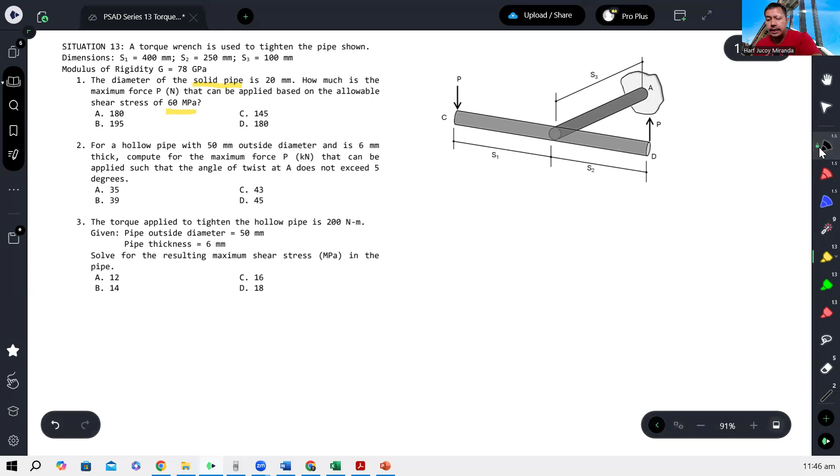First, let's assign dimensions. This is S1, 400. This one is 250. And the length of the pipe is 100. All units are in millimeters.

These two forces given have the same value, so they will be considered as a couple. A couple is composed of parallel forces equal in magnitude but opposite in direction. Definitely they will produce a moment, and that moment will give a torsional effect to this pipe.

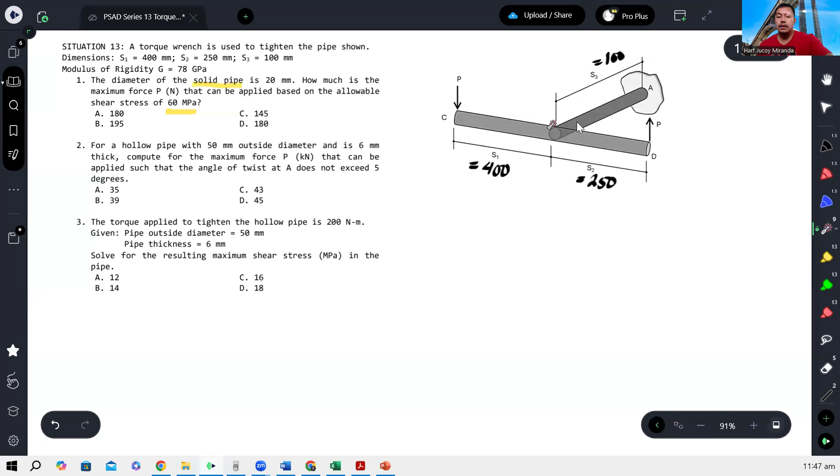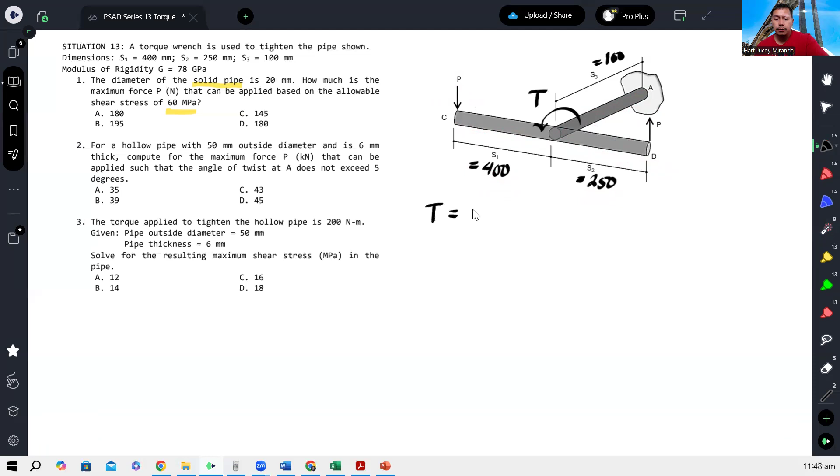To calculate the moment of a couple, multiply the magnitude of the couple by the distance between them. Here, the distance will be 400 plus 250. So the torsion applied, which we'll call T, will be equal to P times 400 plus 250, or P times 650. Assume this is in Newtons, so the units will be Newton-millimeter.

For number 1, assume the shaft is solid, with a diameter of 20 millimeters. We apply torsion, and we need to recall the shearing stress due to torsion.

That is equal to, for solid or any pipe, T rho over J, where rho, if you want the maximum, must also be maximum. So the maximum shear is found at the farthest distance from the center. Rho is the radial distance from the center, so it's at the surface.

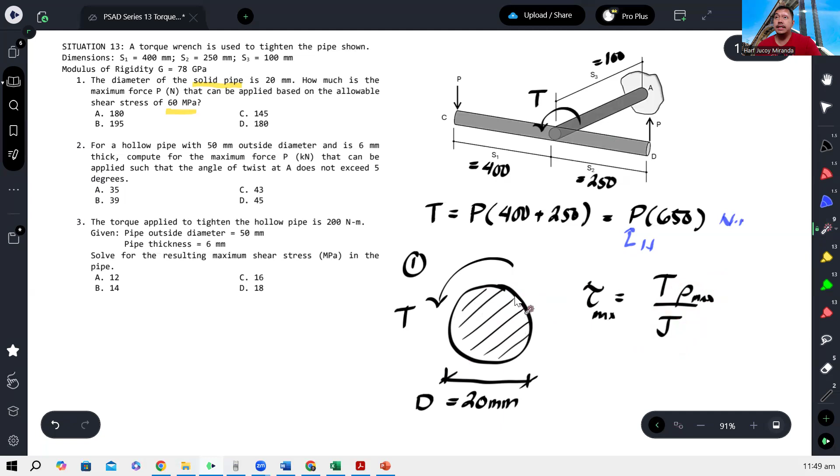And J is the polar moment of inertia. For a circle, that is pi over 32 times diameter to the fourth. And this is our torsion. I want to show that when the shaft is solid...

I don't have this memorized, but maybe you do this: the maximum shear stress equals torque times the distance, which is the radius, half of the diameter, divided by pi over 32 times diameter to the fourth. As you can see, the diameter cancels, becoming a cube. Then, simplifying, 32 divided by 2 gives 16.

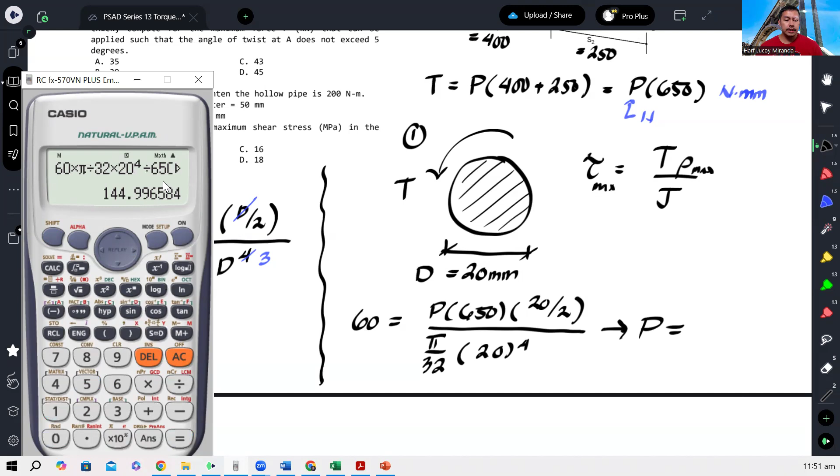From here, you can easily solve for P. So you have 60 times pi over 32, times 20 to the fourth, divided by 650, divided by 20 over 2 or 10. That gives us 144.99, or approximately 145. Take note, I assumed it's in Newtons, so this is in Newtons.

Also, this is in megapascals, this is in Newtons, this is in millimeters. So when everything is in millimeters and Newtons, the resulting stress units become megapascal. So that's for number 1, which is 145.

Number 2: for a hollow pipe with 50 millimeter outside diameter and 6 millimeters thick, calculate the maximum force that can be applied such that the angle of twist at A does not exceed 5 degrees. So now we're dealing with angle of twist, and our section is hollow.

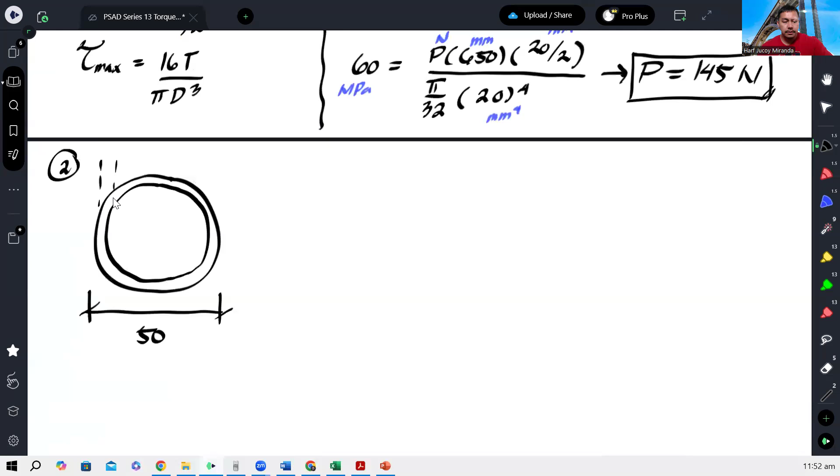So the outside diameter is 50. Tama ba? 50. Tapos yung thickness niya ay 6, 6. So ibig sabihin, yung inside diameter niya would be 50 minus 6 minus 6, so 38.

So yung outside diameter natin ay 50, yung inside diameter natin ay 38. Dahil angle of twist yung given, kailangan daw hindi mag-exceed ng 5 degrees, yung angle of twist. So ang formula naman dito is TL over JG.

Kaya lang dapat yung theta dito is naka-radians. I-convert natin yan sa radians. Tapos yung L na to is yung length ng pipe. So yung length natin, kung titignan nyo, is ito, which is yung 100. So yun yung magiging length natin.

Okay, so substitute lang natin lahat. So 5, gawin nating radians. Kaya mag-multiply ng pi over 180 as a conversion equals P. Ipapasok ko ulit dito yung P times 650 na naka-Newton millimeter na. Tapos yung L ay 100 over J.

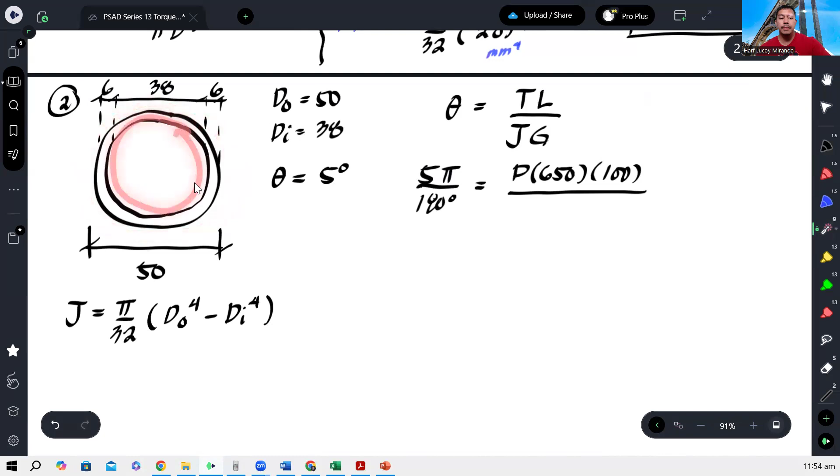So ano yung J? Dito ang pinagkaiba is dahil ito ay hollow section, ang J naman ng hollow section ay pi over 32 times outer diameter to the fourth minus inner diameter to the fourth. Kumbaga, parang minus lang natin yung dalawang solid section na buo at saka yung hollow. Minus lang natin to. Kasi di ba ang original na formula niyan is ito kapag solid. Kaya yun yung magandang isipin para lang hindi puro kabisote, puro kabisado.

Anyway, this is pi over 32 times outer diameter is 50 to the fourth minus inner diameter is 38 to the fourth. And then our G is our shear modulus or modulus of rigidity, given yun, 78 gigapascal. Gawin lang natin itong megapascal, kaya mag-multiply tayo ng 1,000.

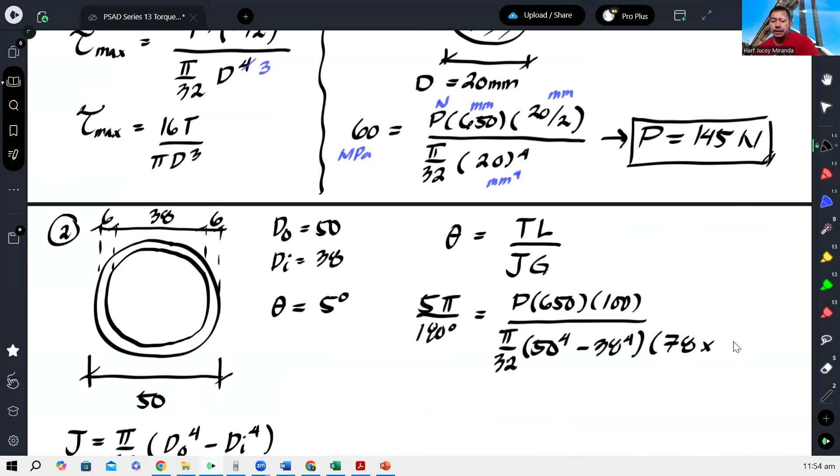Okay, and from here, we should be able to calculate for our P. We have 5 pi over 180 times pi over 32 times 50 to the fourth minus 38 to the fourth, and then cross-multiply din yung 78,000, tapos divide yung 650 tsaka 100.

Okay, so that gives me 42,818 Newton. Pero ang hinahanap na sagot ay naka-kilo Newton, so divide lang natin to ng 1,000. So that's 42.82 kilo newtons. So the answer would be letter C.

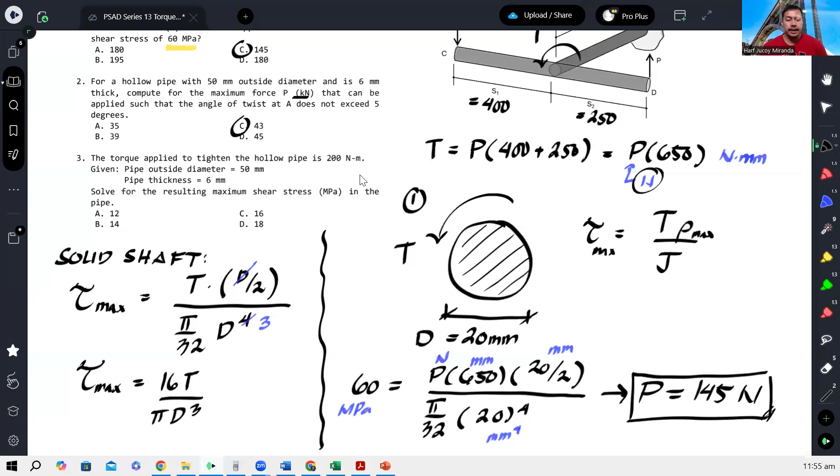Okay, finally, number 3. The torque applied to tighten the hollow is 200 Newton meter. Tapos ganun ulit, ang outside diameter ay 50, tapos yung inside diameter, yung pipe thickness is 6. So this means that ito yung outer, yung inner natin is kagaya lang ng number 2, 38. Tapos tinatanong lang yung maximum shear stress.

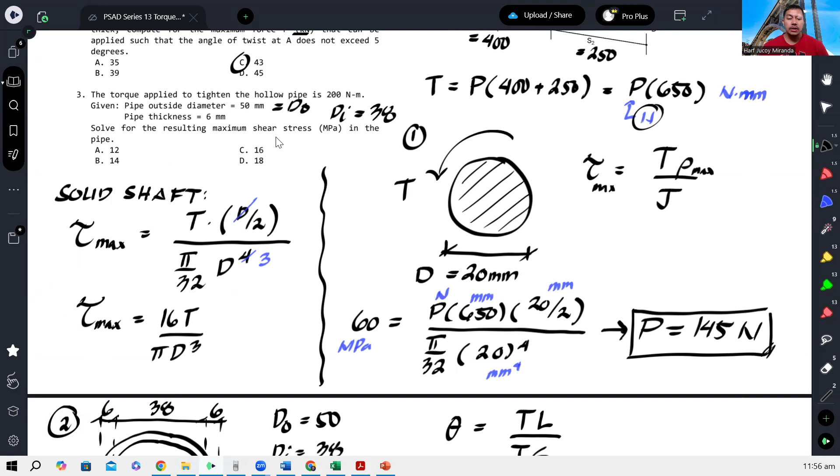So ito, madali lang ito. Babalik na naman tayo sa formula na T rho over J. Kaya lang yung J natin is yung pang-hollow. So we have T is 200 Newton meter. Para maging millimeter, mag-multiply ako ng 1,000.

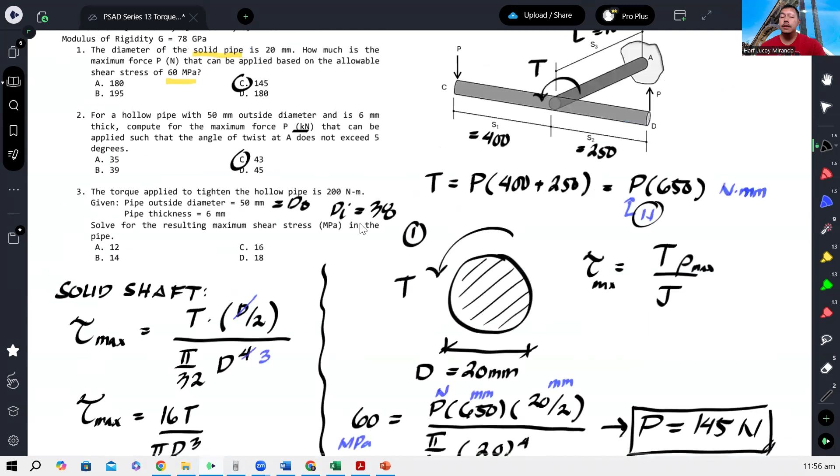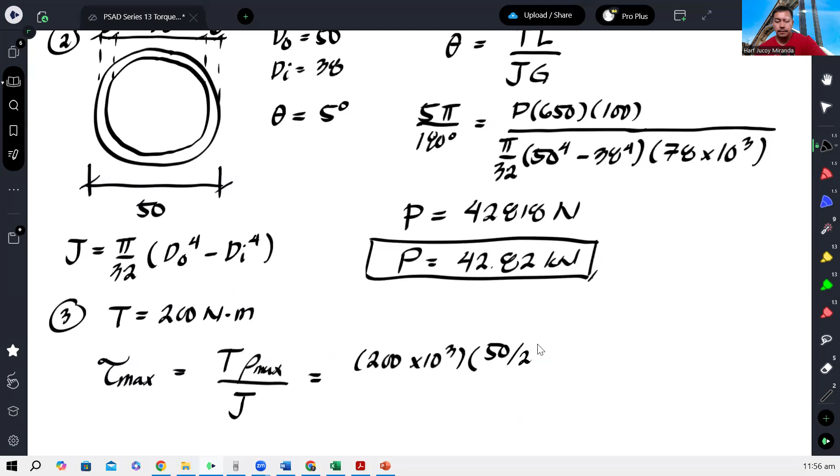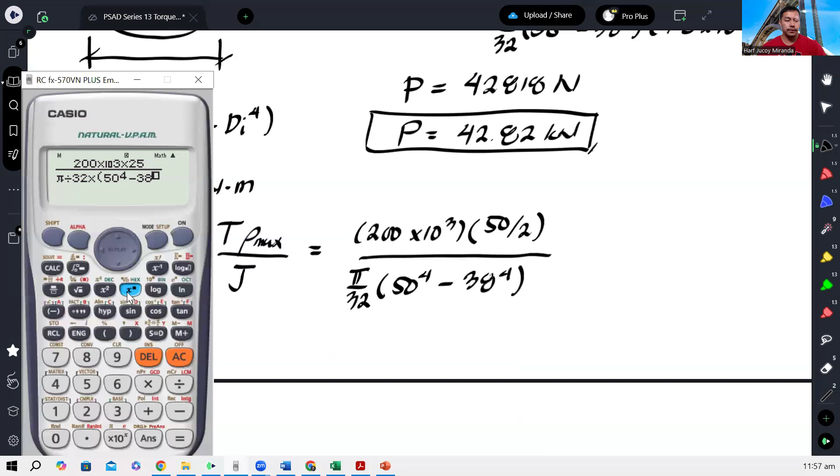Yung rho natin is yung half ng diameter, which is 25, over yung J natin is pi over 32 times 50 to the fourth minus 38 to the fourth. So therefore, we can now calculate the maximum shear stress. That is 200,000 times 25 over pi over 32 times 50 to the fourth minus 38 to the fourth. And that gives us 12.22 newtons.

Sorry, megapascal rather. Shear stress nga pala. Megapascal. Okay, so hence our answer for number 3 is letter A.

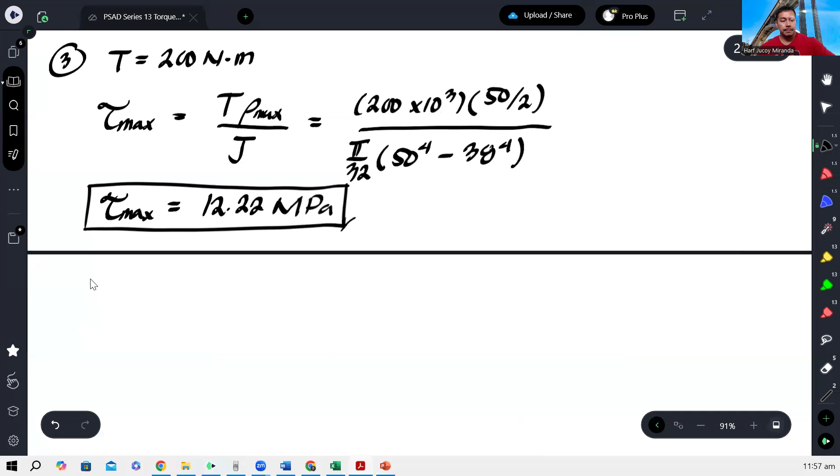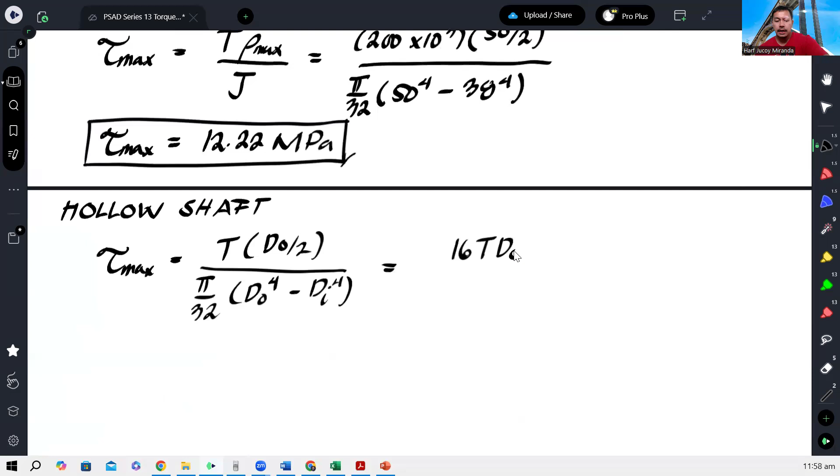Also, kapag hollow shaft, kung gusto nyo halimbawa, formula, hollow shaft, shear stress ito. We have T rho, so yung rho, outer diameter over 2. Tapos we have pi over 32, D outer to the fourth minus D inner to the fourth. T rho over J. So kapag sinimplify mo yan, magiging 16 T D outer over pi D outer to the fourth minus D inner to the fourth.

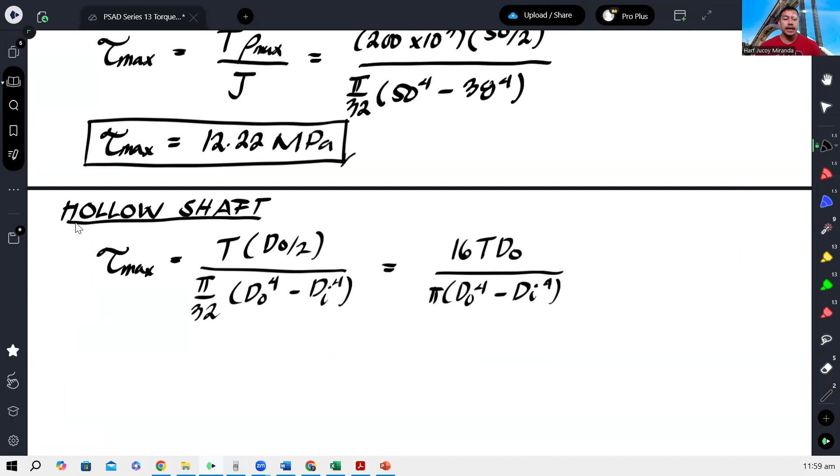Again, ako hindi ko kinakabisado yan dahil sa board exam, mas maganda kung ang kabisado mo is yung generic formula para applicable sa lahat, kumbaga less yung kailangan mong tandaan. Pero kung mataas naman yung capacity ng memory mo, pwede mo rin kabisaduhin yan para mas mabilis. Ang advantage lang naman kung kabisado ito, mas mabilis ka makakapag-compute. Pero again, pang hollow shaft lang siya. Ang generic pa rin ay T rho over J.